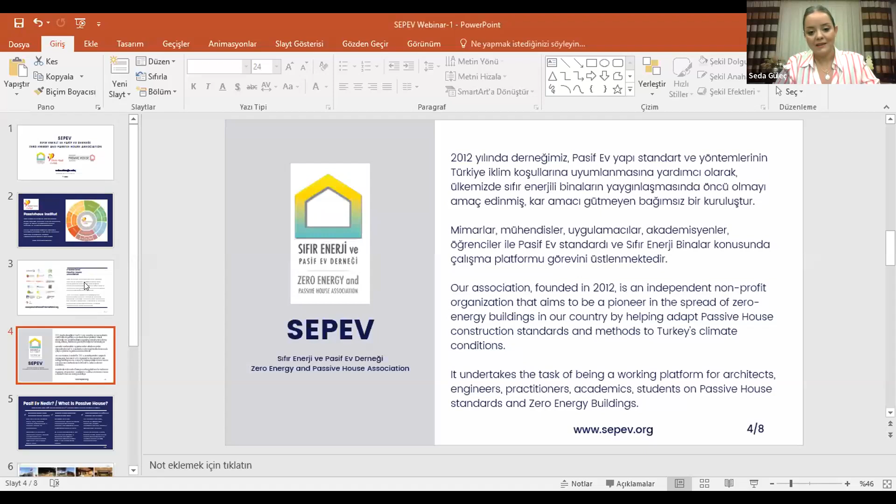Dr. Nesi and Passive House Institute. In fact, Passive House Institute was established in 1996, and our institution was founded in 2012. It's providing a lot of support to the suppliers, scientists, and those parties who are working on passive house, giving information at the global level.

This association undertakes the task of being a working platform for architects, engineers, practitioners, academics, and students on passive house standards and zero energy buildings. Our association was founded in 2012, and we're providing seminars and conferences. We're an independent and non-profit organization that aims to be a pioneer in disseminating zero energy buildings in our country, and we are doing our best to make this known.

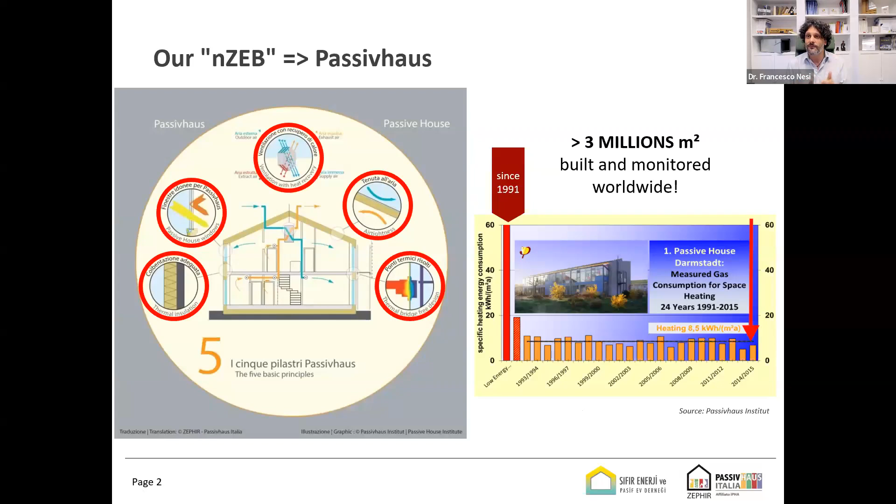Nowadays, we can count more than 3 million square meters built with this Passivhaus standard worldwide. Most of them are also monitored. And as you can see here, we have the monitoring of the very first Passivhaus, which was built in 1991, close to Frankfurt in Germany, which shows that year by year, the Passivhaus building doesn't feel what's happening outside. Basically, you can have a colder year, a warmer year, or some tenants may leave their windows tilted open for the whole heating period. The Passivhaus basically doesn't see it on a statistical average. And that means that we are speaking about a very robust approach and a very cost-effective one.

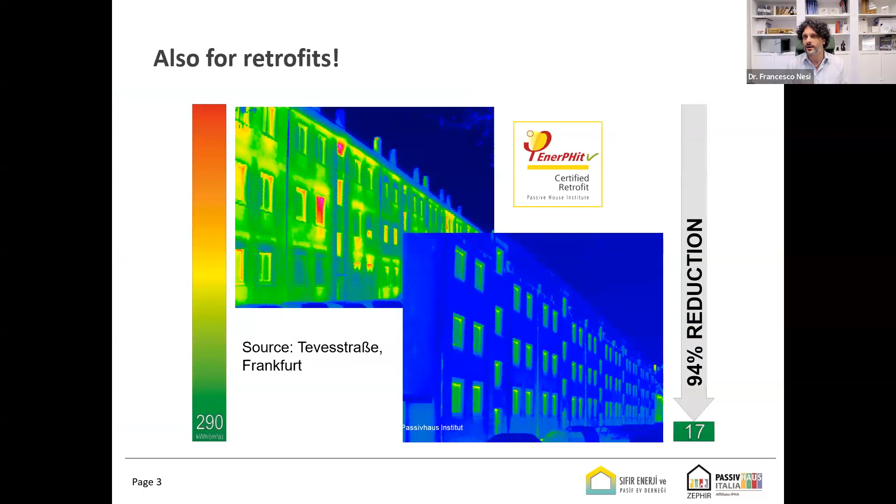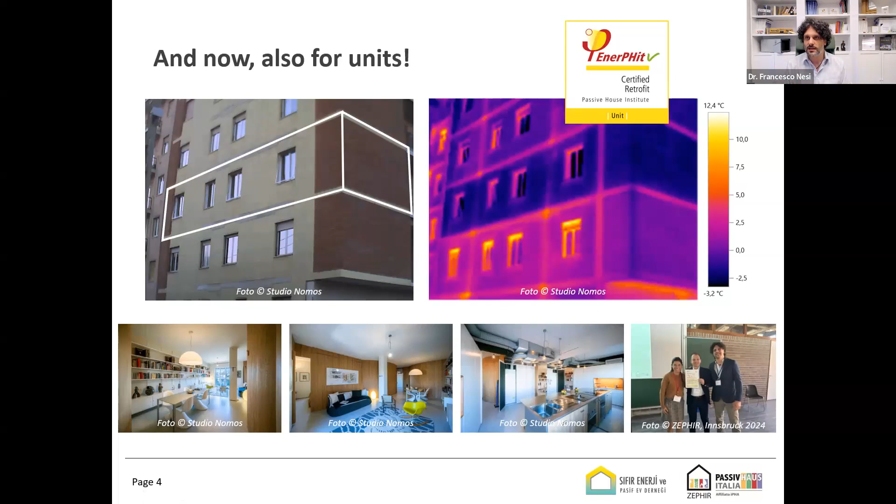And this holds also for retrofits, which is the topic we are going to speak about today, as well as for units. And we are among the pioneers who explored this new possibility and finally got the very first certification as an EnerPHit unit. And here below on the right side, you see PHI issuing us the certificate for the very first EnerPHit unit, which I'm going to talk about afterwards in my presentation. This is in Italy, in Bergamo. But let's keep on speaking about Passivhaus first.

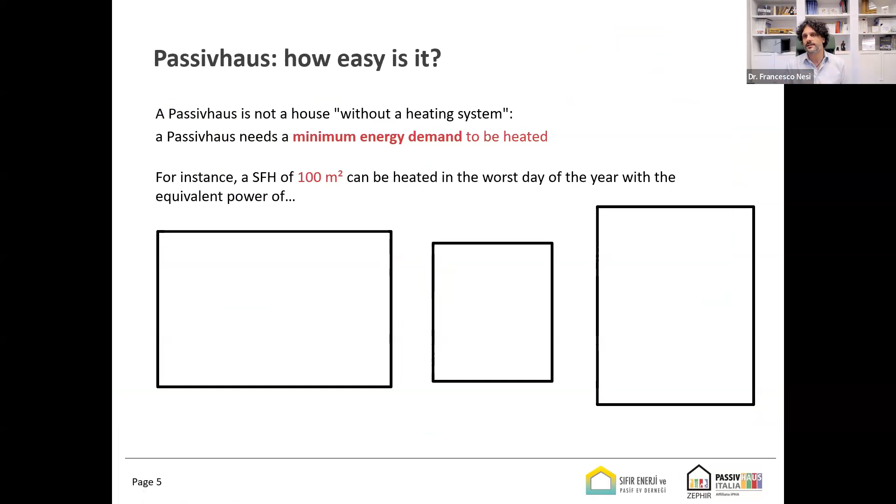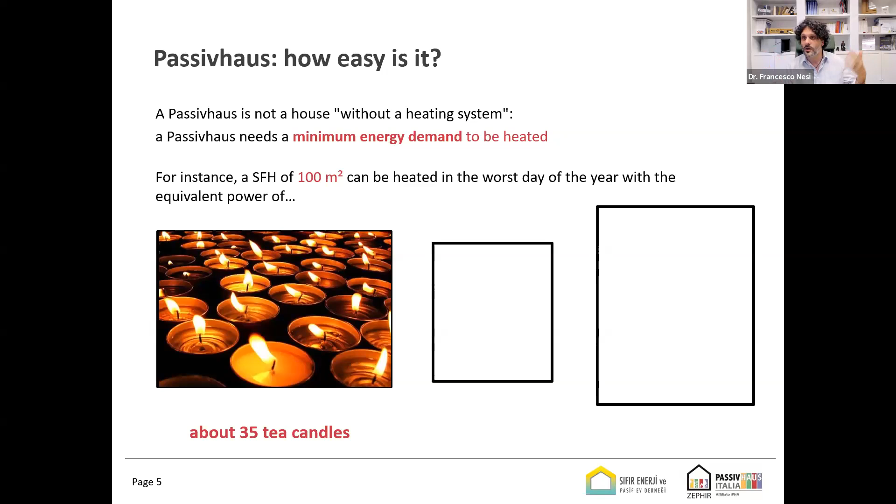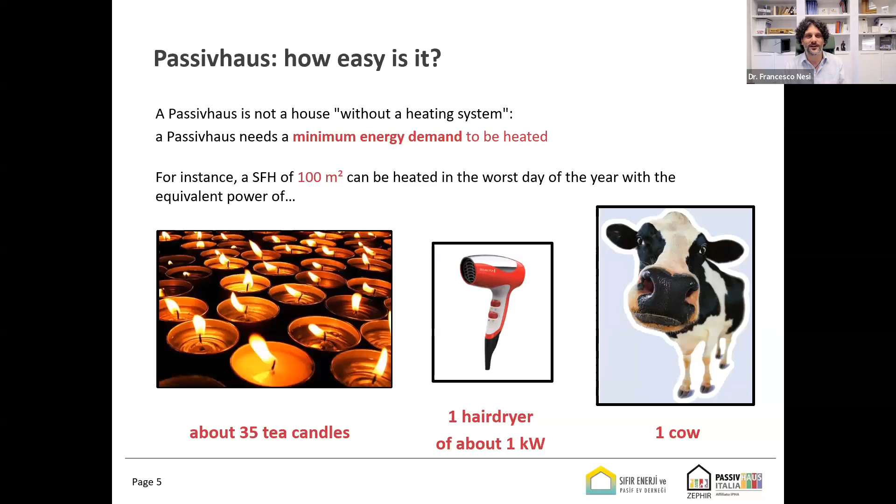So how easy is it? Is it very complicated? How much energy do I need to heat it up, to keep it warm on the worst day of the year? We can assume that the most you need is lighting 35 tea candles, and you have heated up your building on the worst day of the year, or a hair dryer, or a cow, or you could even invite your friends for dinner, and you can get heat for free given by the persons. Of course, you should compare whether you can pay for a dinner for your friends, or you just prefer to light 35 candles. But this is just for fun, just to fix some ideas about how easy a Passivhaus design is.

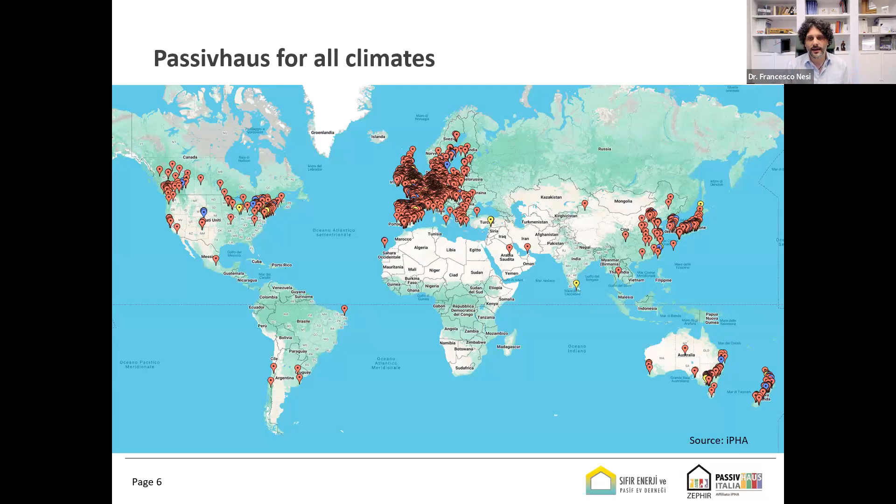Indeed, as already mentioned by Seda, Passivhaus works for all climates, and this is our small contribution in the world. So we have been designing and working in several countries, exploring the most challenging climatic conditions like tropical or subtropical and so on, like Cameroon.

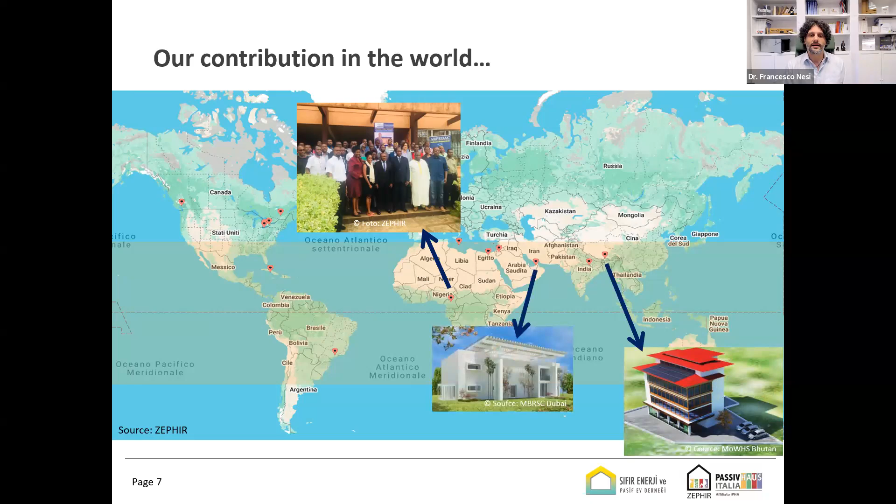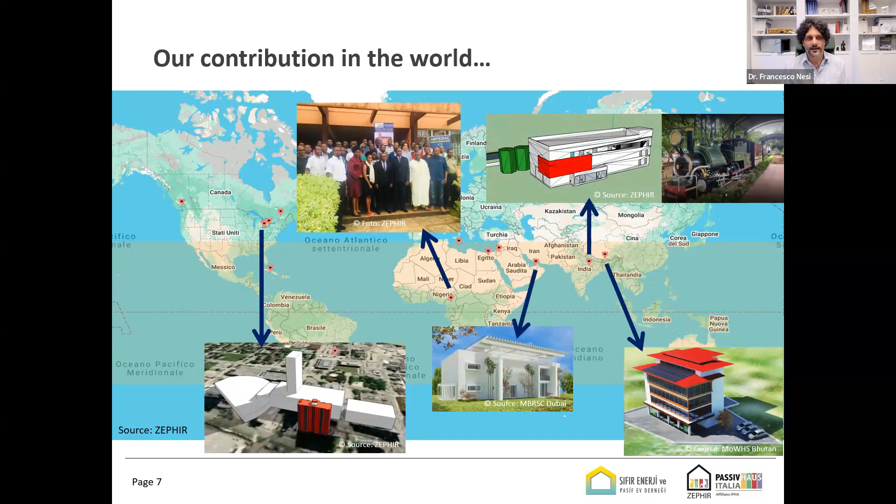We were in Bhutan, a Himalayan country close to India, and Dubai. We have designed a museum in New Delhi, and we are also working in Canada, for instance, for the certification of a skyscraper. So very important for us is to get to know a multitude of climatic conditions in order for us to increase our expertise in designing and supporting designers all around the world for specific projects.

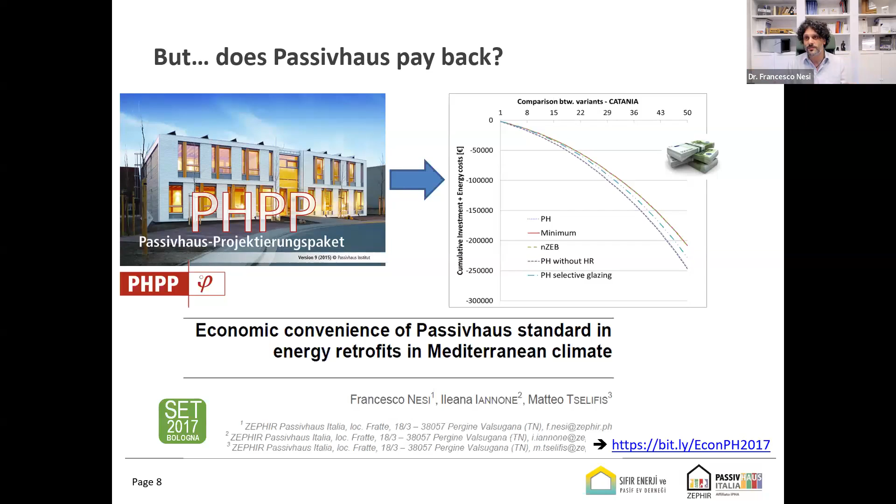So a question which clients always ask us is basically: does Passivhaus really pay back? And how to address this topic towards a client. So back to 2017, we published a preliminary paper about the economic convenience of the Passivhaus standard in energy retrofits in Mediterranean climate, where we explored the possibility to retrofit them up to the national minimum regulation or to the Passivhaus standard. And it came out that Passivhaus indeed pays back immediately, already from the first year. And this was furthermore verified several years later.

So this is an update of 2023, so last year, where we collected a lot of projects. Here I'm just showing some of them, located in several different climatic conditions with different building typologies, either wood or masonry or concrete plus thermal insulation and so on, and with different treated floor area. As you can see here, they are listed by growing treated floor area. You can see very easily that the additional costs, the blue bar, are always lower than the total savings you get already from the first year.

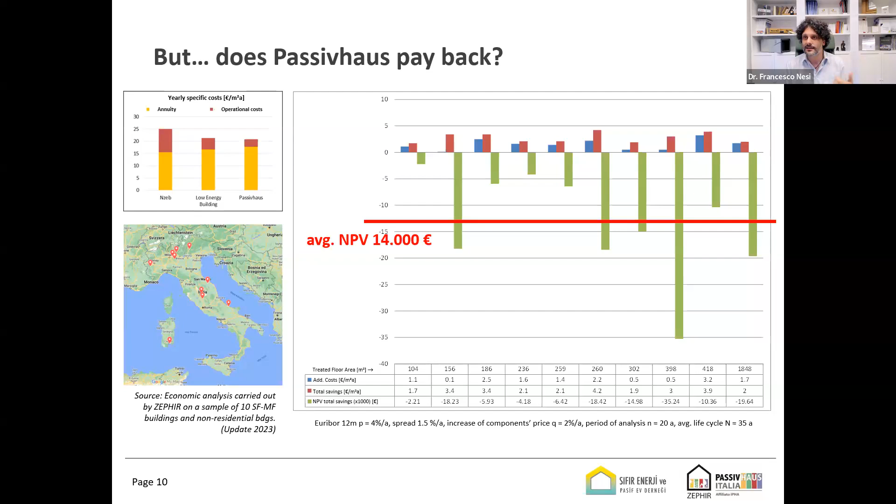So this means for all projects we investigated, we managed through the building physics, through our Passivhaus approach, to bring them to a level that for the client it is immediately clear that they should invest in Passivhaus right now. And if we calculate the net present value of all these projects as an average, we get a free budget, let's say, of 14,000 euros, which means we can demonstrate economically and analytically that Passivhaus pays back, in fact, through the savings during the operation.

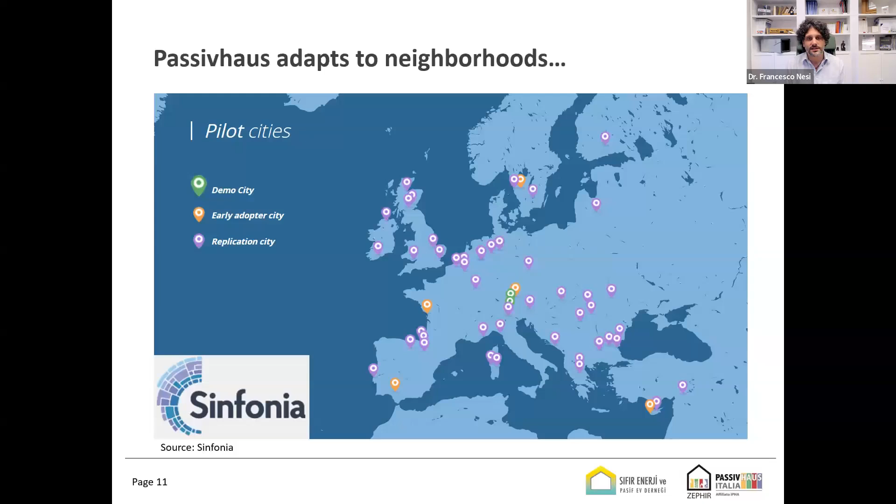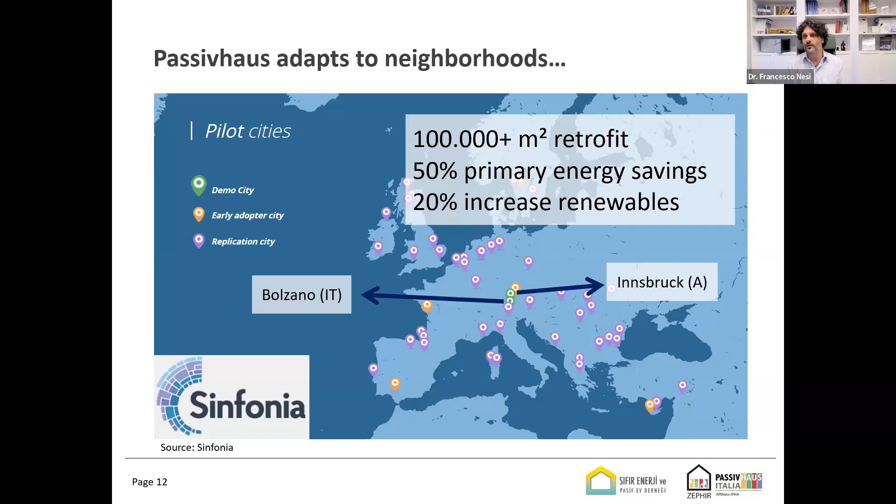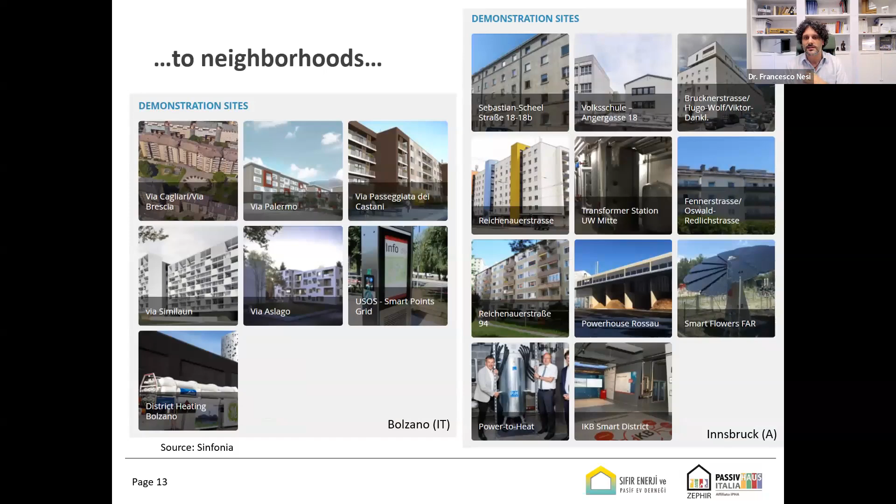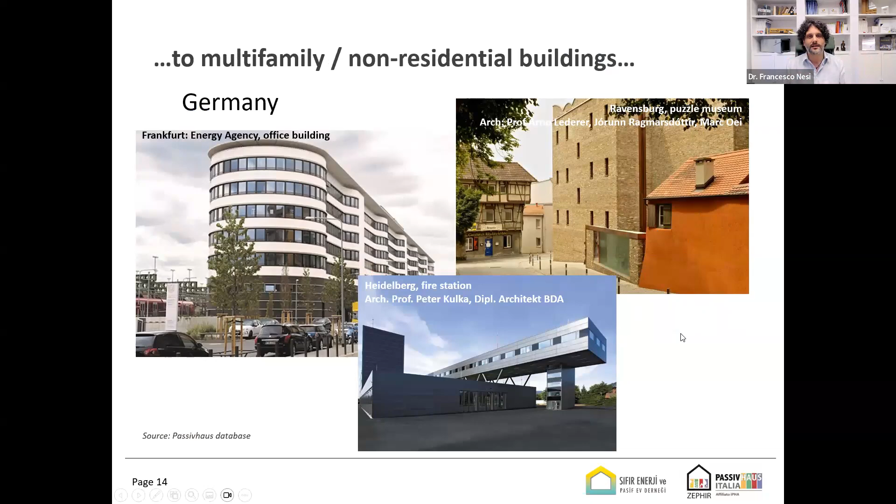Passivhaus also adapts to multifamily and non-residential buildings. Here you can see, for instance, an office building in Frankfurt, or the Puzzle Museum in Ravensburg. You know Ravensburger, exactly. This is the museum for the puzzle, which is indeed a Passivhaus retrofit, or Heidelberg Fire Station. Very different typologies of buildings, residential buildings, very large ones, or even a supermarket at Bahnstadt in Heidelberg. It's very interesting what they did. They collected the free heat released by the fridges and used it to heat the supermarket during the winter time. So nothing strange, just using physics and using reason.

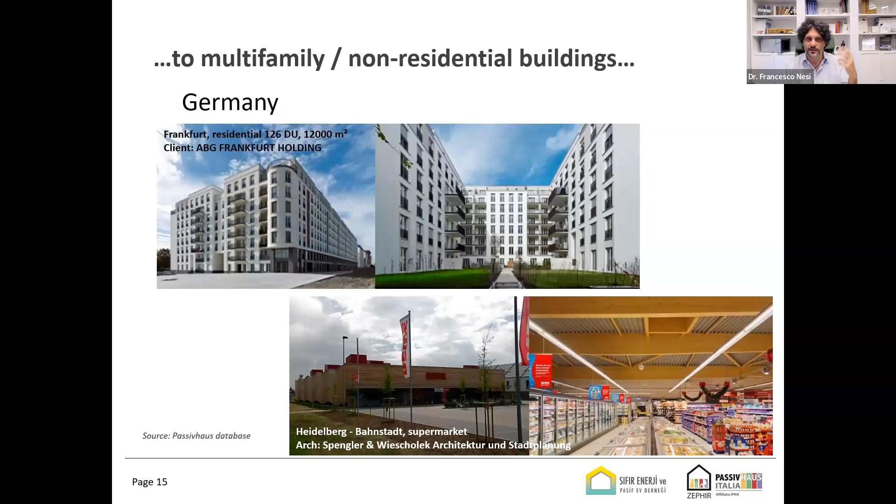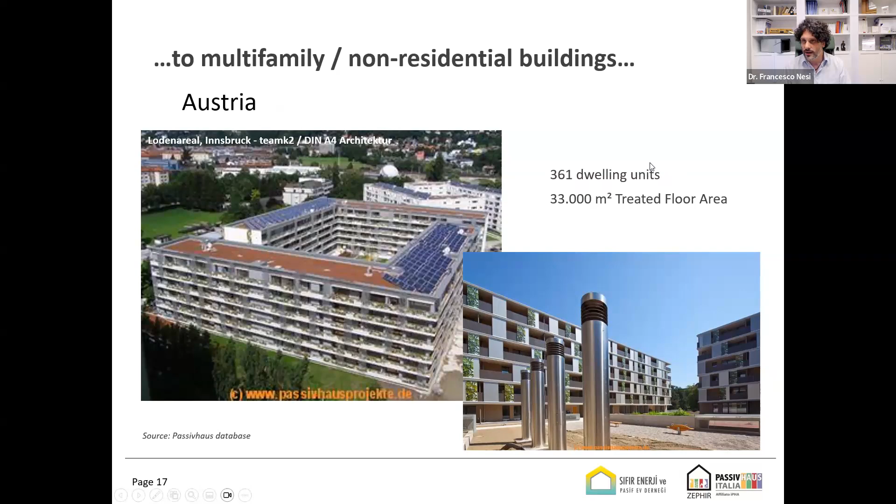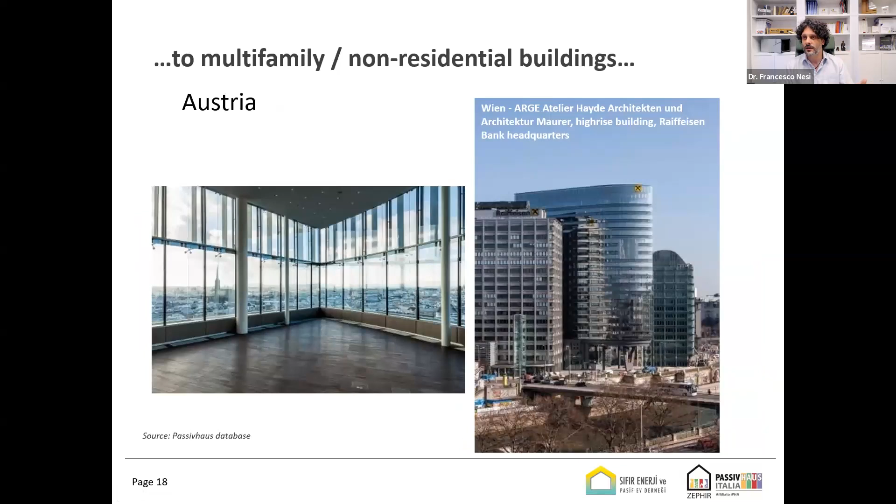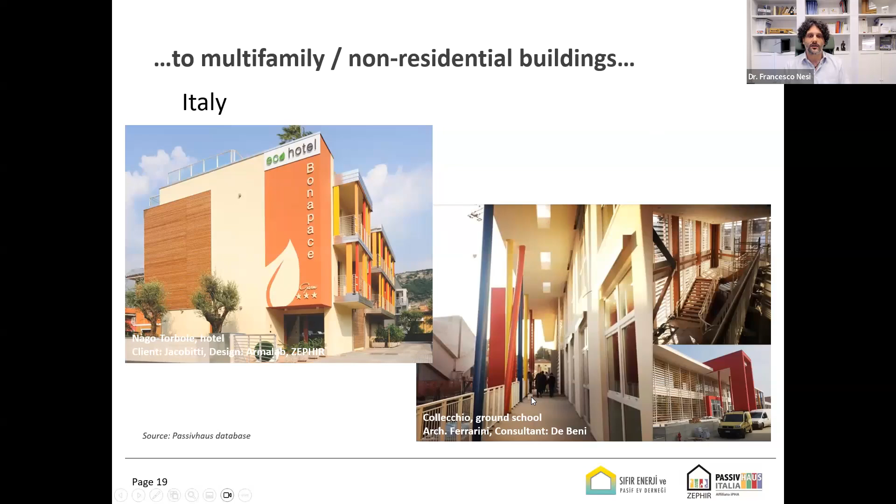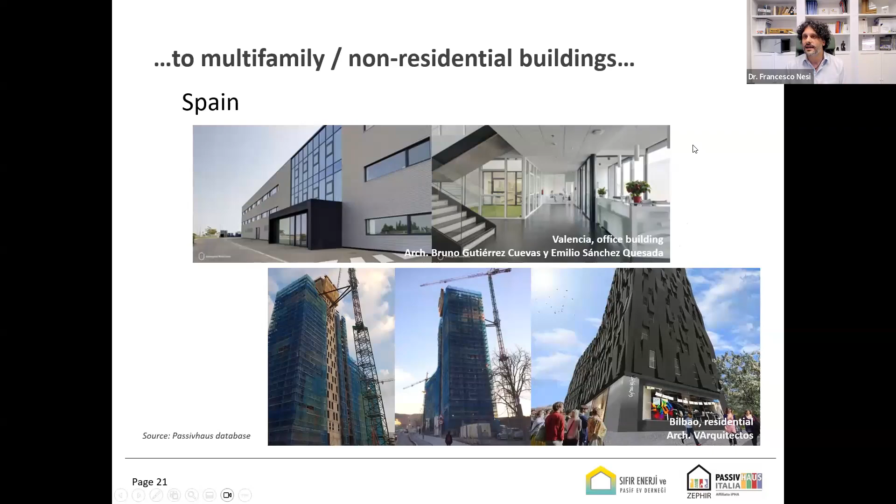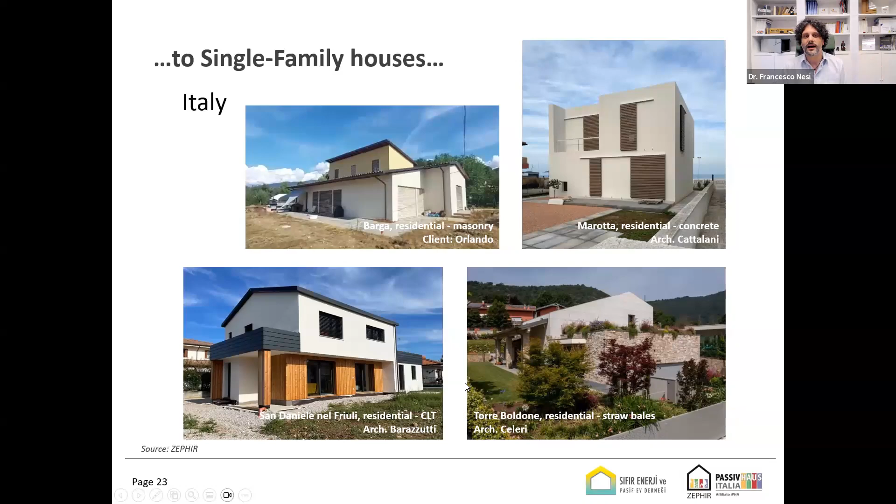In Italy, we also have a lot of single-family houses, and I wanted just to mention a few of them, just to remind that every kind of building typology is indeed possible. Let's say from residential, so masonry construction building, or concrete plus thermal insulation, or residential done in CLT, so cross-laminated timber, construction with external thermal insulation, or even in straw bales close to Bergamo, close to the place where we did our Retrofit unit. And there we come, exactly.

The very first worldwide Retrofit units, one for flat done by us, and another one for offices designed and realized by homegrid. So the Portugal affiliate in Aveiro, in Ílhavo. So this is the office retrofit. I'm just starting by the project done by them, and then I'll come to the project we followed directly. So the office retrofit is located in Ílhavo.

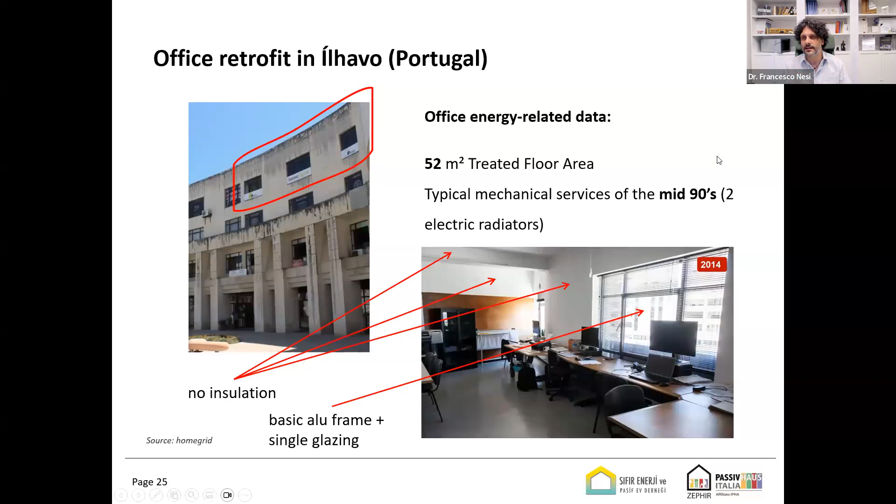These are some energy-related data. So 52 square meter treated floor area, typical mechanical services of the mid-90s with 2 electric radiators, which is very common in Portugal. No insulation at all on walls or ceilings, and basic aluminum frame with single glazing. This is the situation they found in 2014. And after some years, they decided to retrofit it for several reasons.

First of all, they paid so much for electricity, which was indeed needed for heating up the office, and they paid more or less like a rent. So at the time in 2018, the average office rental in Ílhavo was about €5 per square meter a month, and they paid roughly the same. So a second rent, they decided, no, come on, here we must retrofit it.

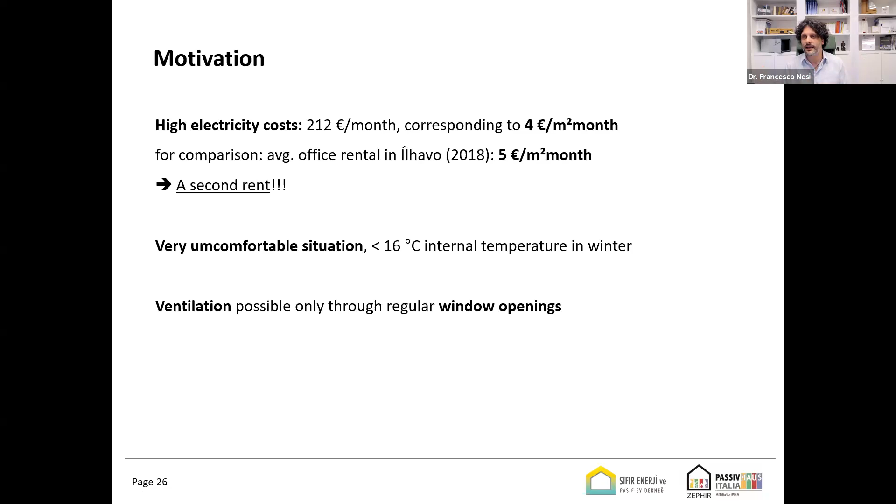Besides this, they had a very uncomfortable situation. They monitored, they measured the ambient temperature. It didn't come even higher than 16 degrees as internal temperature in winter. And the ventilation, they had no mechanical ventilation at the time, and they only ventilated through window openings, thus losing a lot of energy.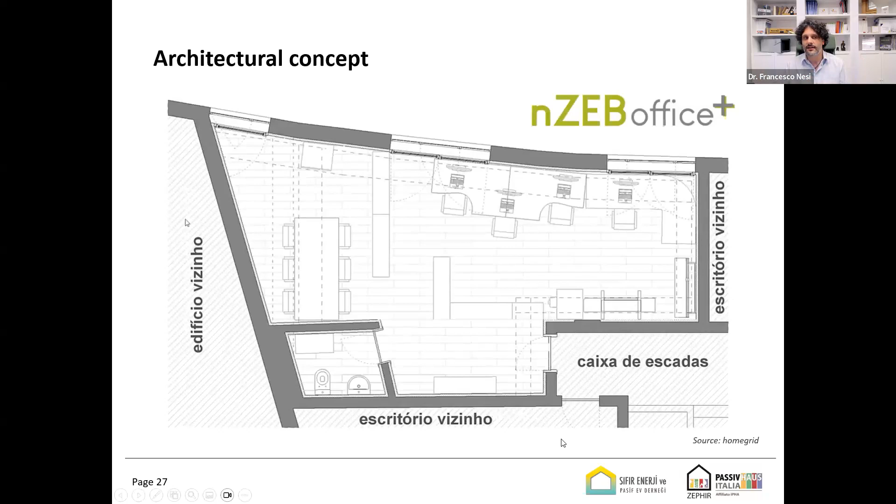So this is the architectural concept. They intervene from the inside, of course. Here is the staircase, and here at the right-hand side and down, they have other offices as well, as you see on the left. So, of course, they had to intervene, as said, from the interior, and they applied on the external walls 6 centimeters XPS. They did the same for the roof, and 2 centimeters XPS to the floor.

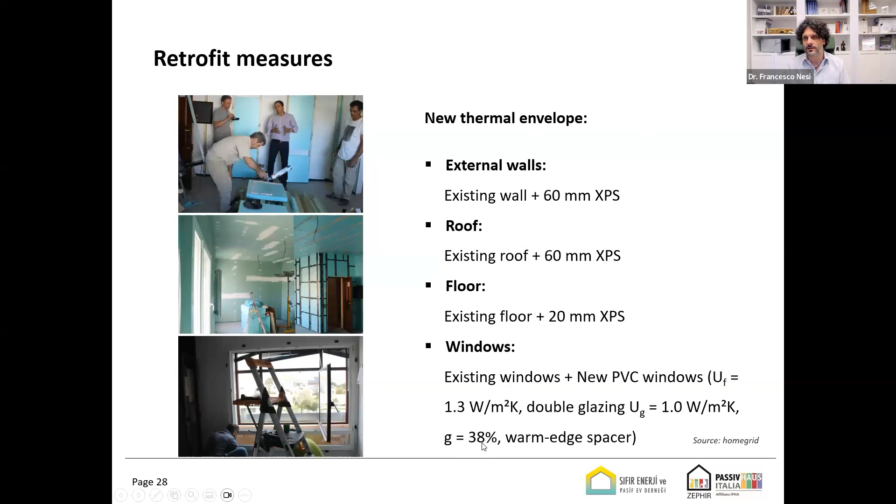And they decided to leave the existing windows there and install on the outside new PVC windows with the Uf usual for this kind of climate, like around 1.3, double glazing, a small g factor, sort of selective glazing with warm edge spacer. New mechanical services were also installed. So a ventilation system came in place, as you can see, with a very, very low annual electricity cost, roughly €35 a year. And for heating and cooling, they decided to install a 2 kilowatt split unit by Daikin Premium Plus.

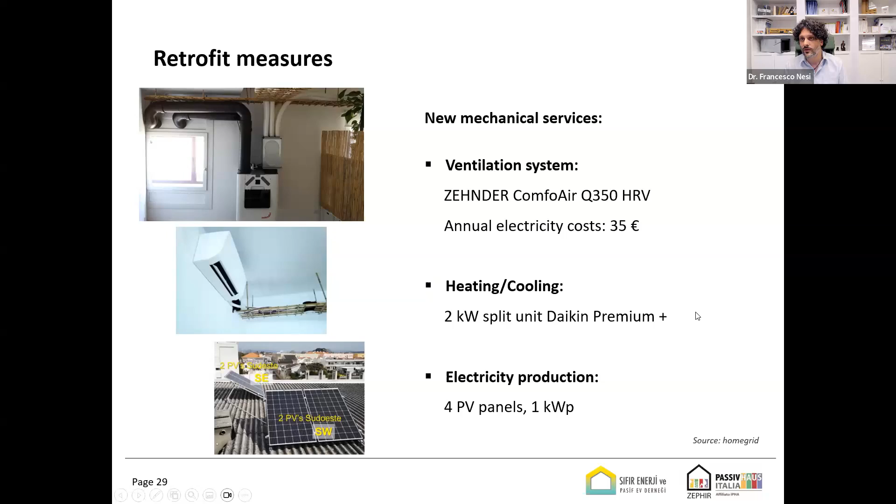Just to have a close look at the PHPP results before the intervention, by assuming, like in reality, that the neighboring offices are not heated, so they are really suffering a lot of discomfort because they are not going to heat them during the winter. Of course, you have a lot more thermal losses through the neighbors. And in this situation, from the actual situation in 2014 to the situation after the intervention, they save even 75% of the energy.

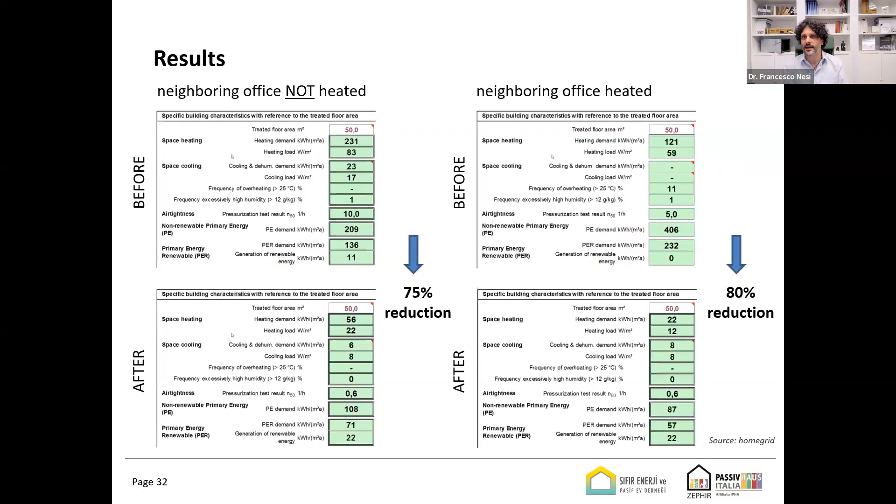And if one assumes that the neighboring offices are indeed heated, which is not the reality, but just in theory, they would have got an 80% reduction. So let's say between 75 and 80% reduction on the overall energy, which is indeed a great result. They are also monitoring the office costs, and as you can see, they are also monitoring the energy production by the photovoltaics, thus compensating the energy consumption, and coming to a negative daily energy balance.

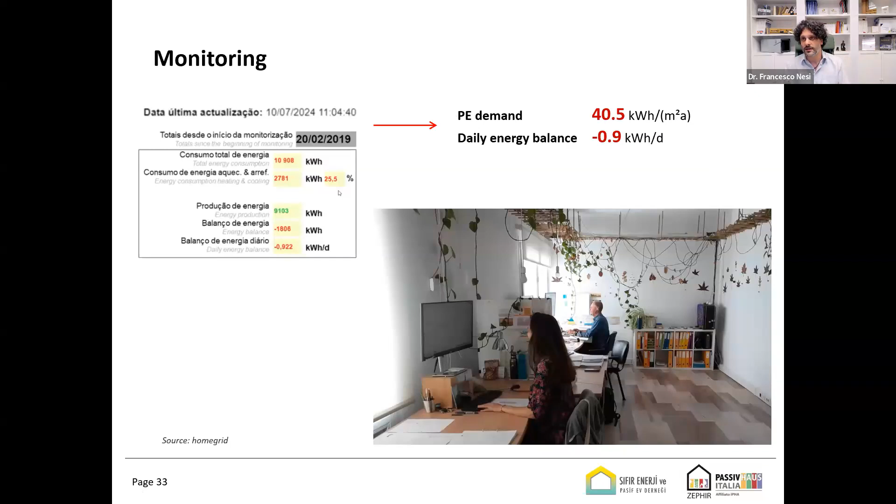So they are getting more energy than needed. And the PE, the primary energy demand, is very, very similar to what was designed before the construction.

Let's come to the apartment retrofit in Bergamo, Italy, which we followed directly. So the owner is an architect, and he wanted to use his project as a showcase to demonstrate that passive house retrofit is indeed feasible. And the motivation is that we have an existing building stock which is composed by basically 93% of dwelling units which are individually owned.

So it's very, very difficult to retrofit a multifamily building, because most of the times this will never belong to just one person who can decide for the retrofit, but we should agree among all the tenants what to do, and we will never come to an end. And that's why it's very important that we wanted to demonstrate the possibility to retrofit just one dwelling unit.

We had several financial schemes. I also see in the chat that someone is asking this, called super bonus. So after the COVID, we got a lot of money from the EU, which the government decided to invest for retrofitting buildings and dwelling units. But as you can see, since 2020, people didn't use this money to come to the highest possible energy level, as one could think, but just reaching the lowest energy classes.

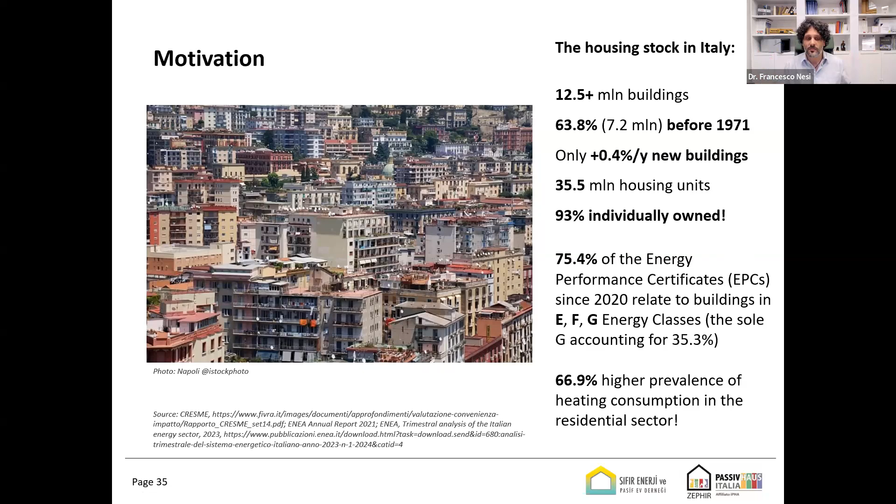So this big amount of money didn't indeed produce a significant energy reduction for the Italian sector, and just 1 or 2% of the energy performance certificates are listing buildings in class A, the maximum, which is a very bad situation. And even though we are the country of the sun, as one always says, still we are consuming so much for heating up our houses, and we can estimate that this is around 67% of the heating consumption coming only from the building sector.

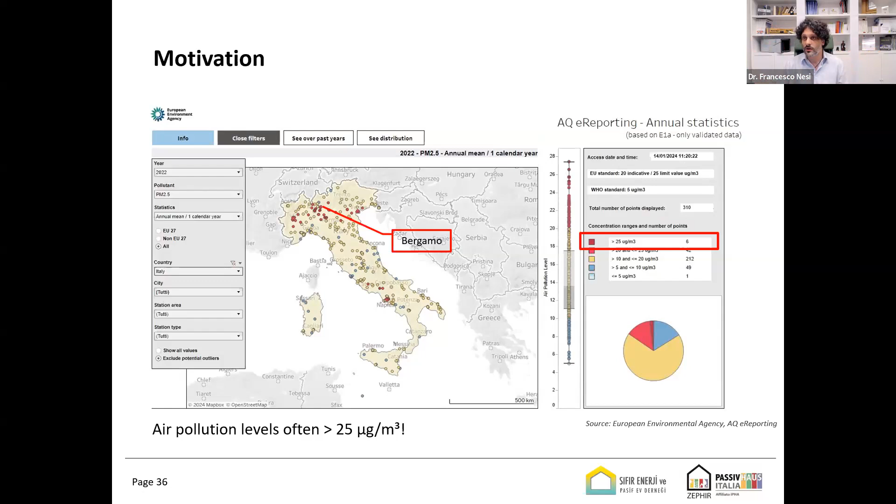Another motivation for the owner, for the client, was due to the very bad air quality in the Po Valley. As you can see also from the literature or from the internet, the Po Valley is a very flat valley, which is very highly polluted from Milan to the Adriatic coast, and the need for fresh air quality was in fact a good motivation, a good stimulus for the client to proceed with the passive house approach.

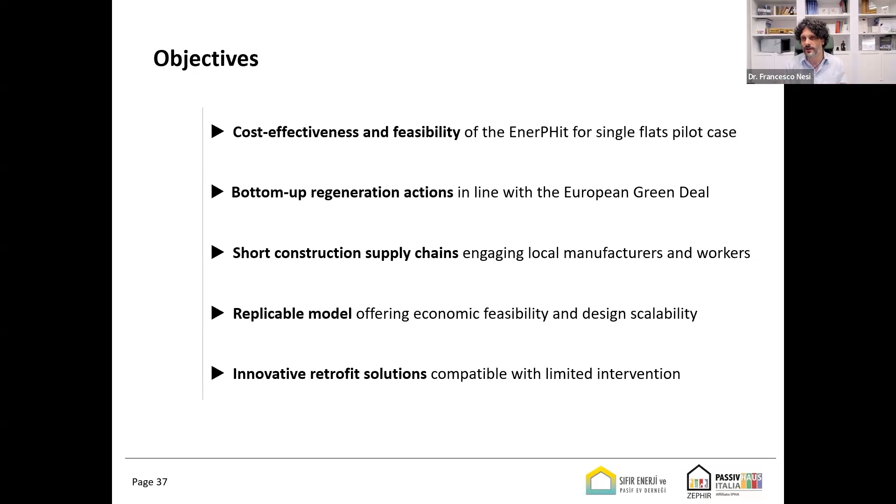So the objectives, first of all, cost effectiveness and feasibility of EnerPHit for single flats pilot case. So we wanted to show this. We wanted to implement bottom-up regeneration actions in line with the European Green Deal, and to realize short construction supply chains engaging not experienced but still motivated local manufacturers and workers, thus creating a replicable model offering economic feasibility and design scalability, and finding innovative retrofit solutions compatible with limited intervention, as it happens in multifamily buildings.

And interior thermal insulation was indeed a major challenge, because this would have increased the risk for interstitial condensation and mold formation. Another big issue to overcome was to create a seamless airtight layer and thermal bridge mitigation. So an ambitious task, also because we had architectural and structural constraints. Due to very heavy traffic in the neighboring street, we couldn't install external scaffolding, and that's why we had to be very quick in doing all the works.

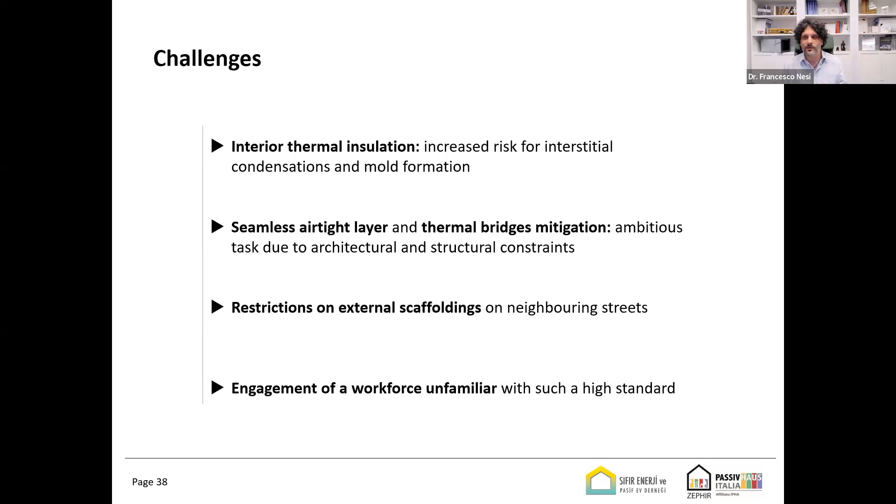And also the engagement of a workforce unfamiliar and untrained with such a high standard was also a major issue, which we will see in a moment. And we had to train them really on the building site.

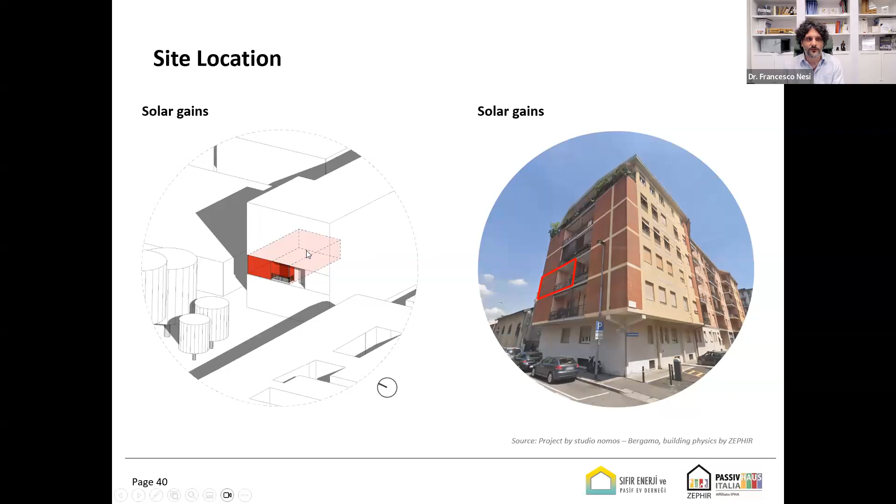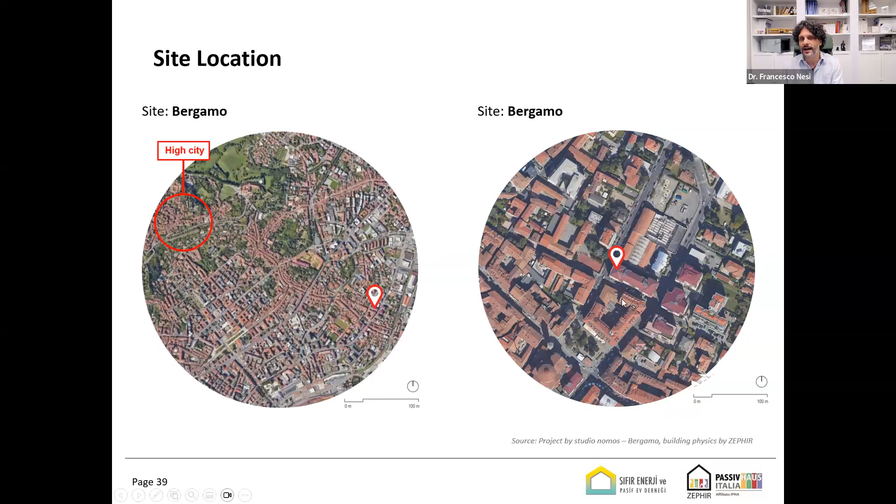This is where the project is located. So here, not so far from the city center in Bergamo, this is the big building. So just one dwelling unit in a multifamily building of 120 dwelling units. And of course, due to the constraints, we had limited solar gains. As you can see here, the only two exterior walls are facing north and west. And at the western side, there are also very big and high surrounding buildings, which also produce shading on our dwelling unit, on our flat.

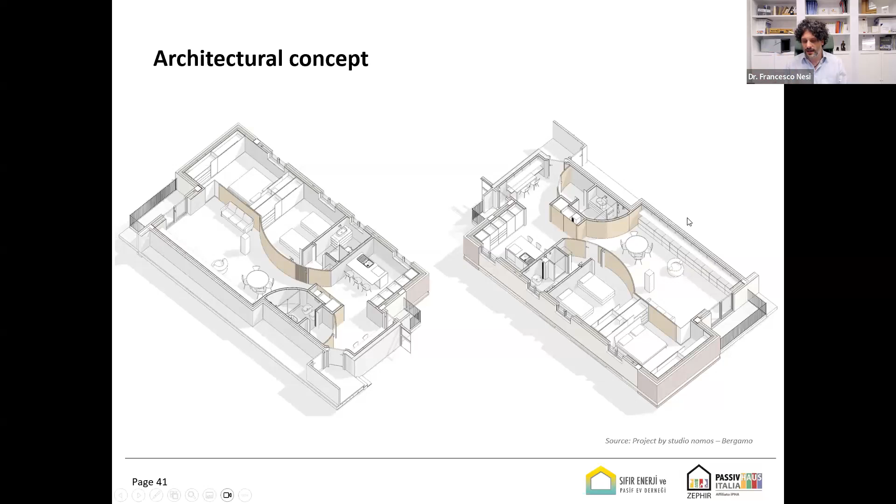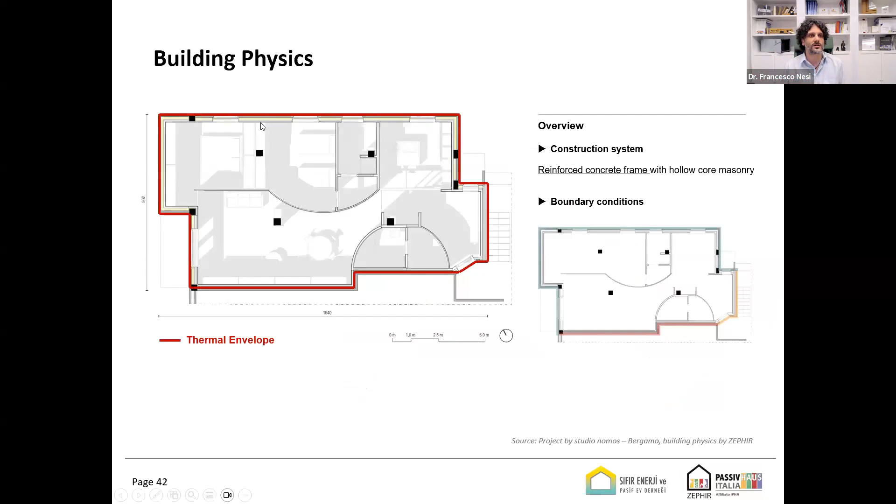So this is the architectural concept after the renovation. Here you can see a couple of balconies, which were then also used for installing the air conditioning outside. And the walls were done by wall cavity, so 2 layers of brick with an air layer in between. So we decided to remove the internal shell by installing some insulation on the interior. This is how it looks. So for the building physics, as a building physicist, we should also have this slide, of course. So this is the thermal envelope, and these are the boundary conditions.

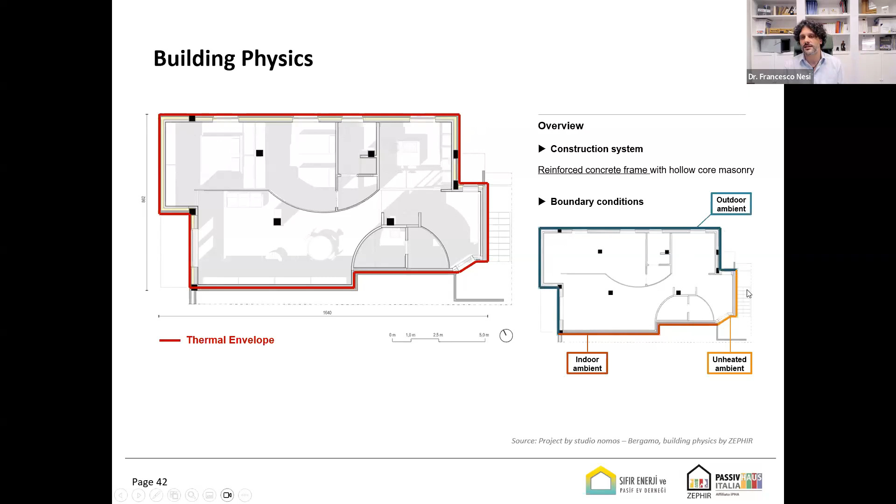So these walls are facing outside, so to outdoor ambient. Here they are towards a neighbor. That's why we are not losing energy through these walls. And partially we are losing energy through the staircase, so to one unheated ambient.

We used a very high thermal resistant material, which is polyurethane, directly in contact with the outside layer of bricks. And in the service cavity, we installed mineral wool. Then we have concrete pillars in between, and they were wrapped up by vacuum insulation panels with a very, very low thermal conductivity, thus not taking out any centimeter more of living space to the interior. So this was also one of the goals we wanted to reach. The rainwater downpipe was also installed inside the insulation layer.

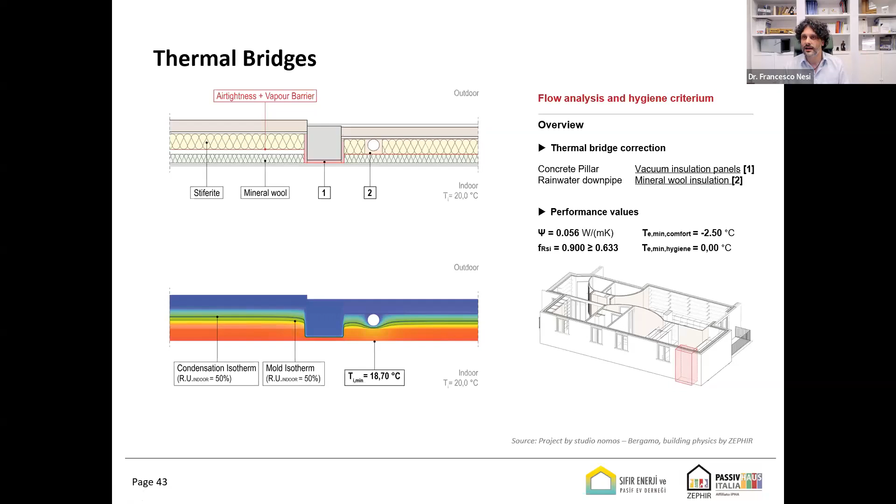And as you can see here from thermal bridge calculation, everything is very well realized, and the minimum interior surface temperature is pretty high, thus giving a lot of more comfort to the occupants. By intervening from the interior on the sole flat, it may happen that we are not heating up for free the neighboring apartments, thus putting them in a very bad situation in terms of mold formation, because it may happen that their surface temperature is decreased at a point that mold forms on the perimeter building assemblies.

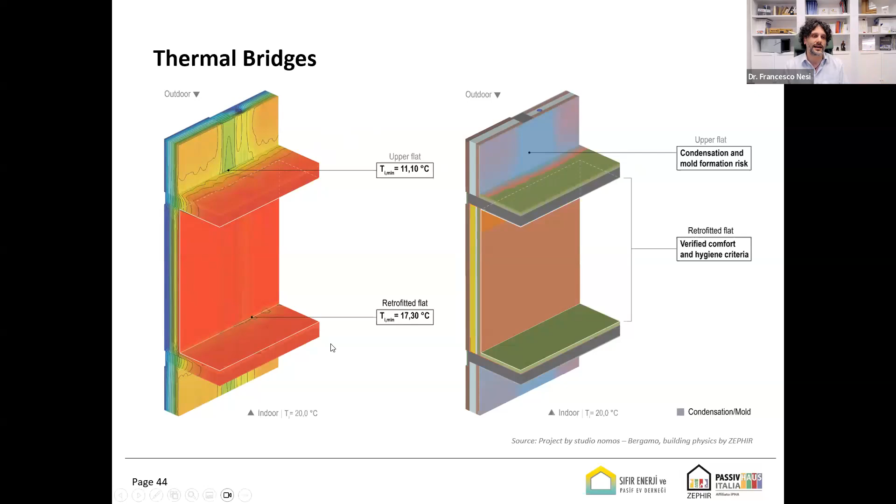That's why we also realized 3D thermal bridges in order to understand this issue, and we wanted to verify this before starting the construction. So here you can see a vertical section through a French window towards the balcony. Here in the center is our flat, and here upper and below we have the neighboring apartments. Before the intervention, the interior minimum surface temperatures were totally in the area of mold formation or even condensation.

And after the intervention, as you can see, a new roller shutter box was installed, very well insulated, triple glazing instead of single or double glazing with air in the gap between the glazings, and some lateral insulation done by calcium silicate panel was also put here in order to increase the surface temperature.

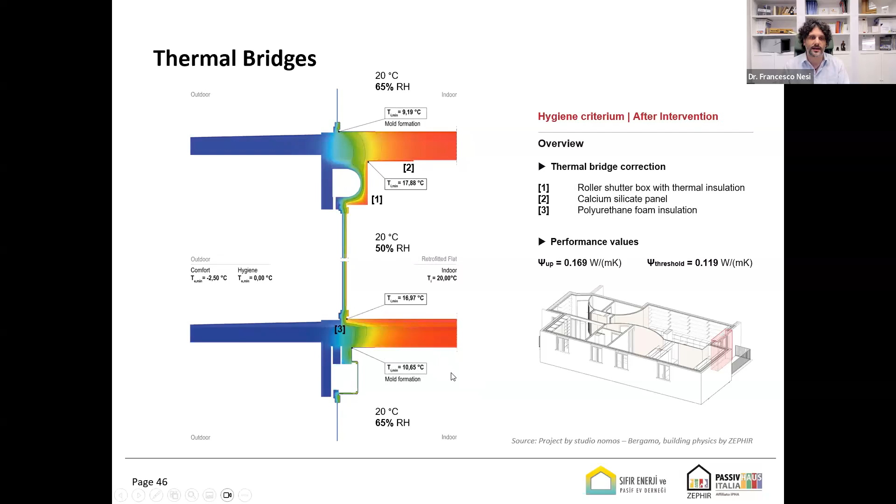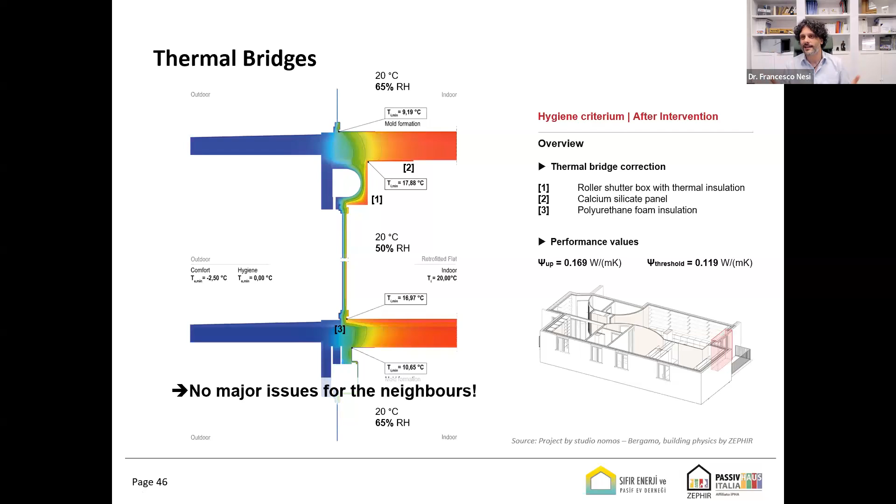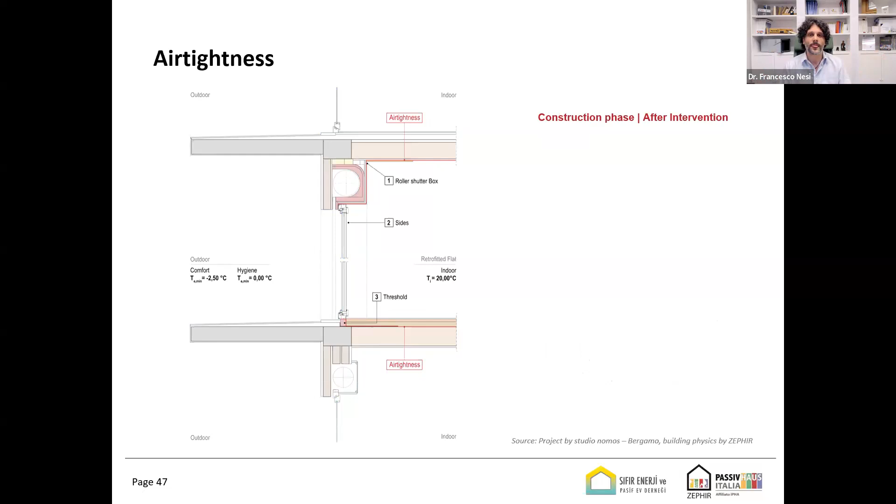And you can see that on the other hand, the minimum surface temperatures of the neighboring apartments didn't vary so much from before, because we had 9 something and 12 something, and afterwards 9 something and 10 something. So it was bad before and is still bad afterwards. So it didn't create any major issue to the neighbors. So if they have mold, it's their fault and not ours. This is very important also to prove to the neighbors, also from a juristic point of view.

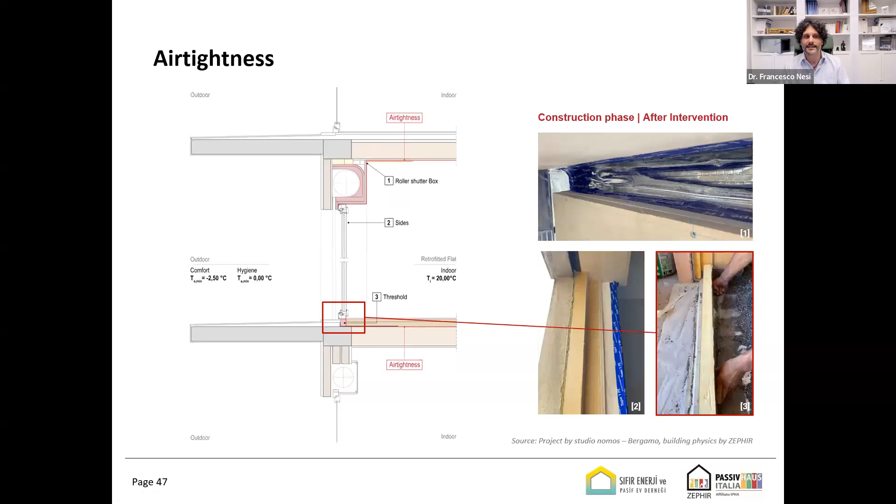For the construction phase after the intervention, good care was also taken to the realization of the airtight layer at the joint with the intermediate ceiling, as well as to the reveals of the windows and the seal of the French windows. And nevertheless, even though we trained all the workforce used at the building site, they made a sort of disaster, because as you can see here, there are a lot of cracks in the airtight layer, and the result of the blower door test was totally unsatisfactory, being larger than 1.6. And we were striving for less than 1, at least.

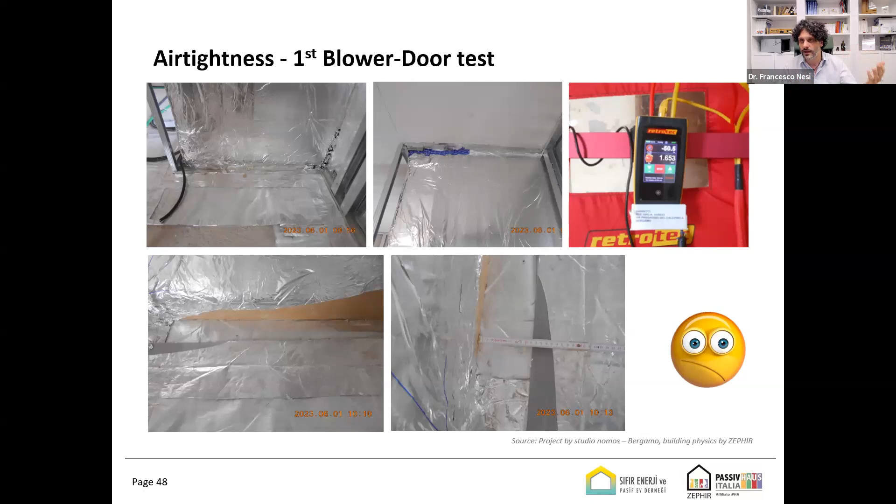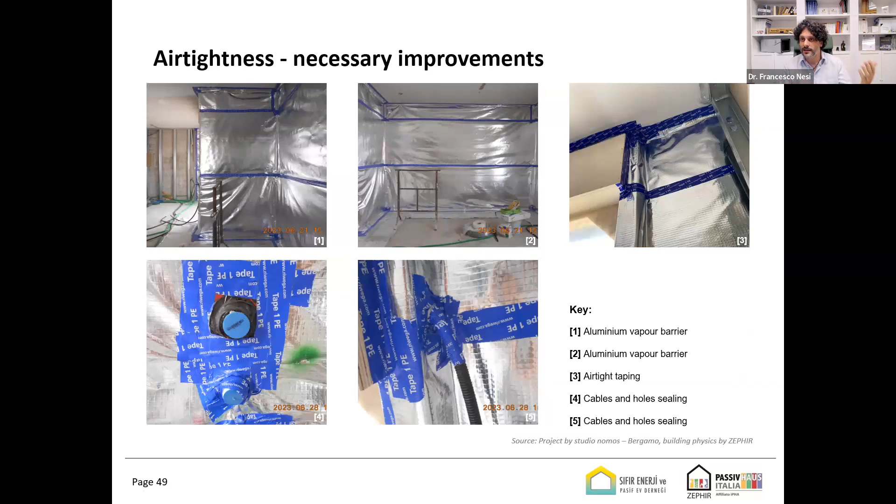Of course, this is due to the workforce unfamiliar with air tightness, but also to the bad choice of the membranes done by the owner. Then we trained them, we explained it again, and they redid everything from scratch with the necessary improvements, as you can see, and also by the right use of tapings everywhere, we could come to the desired result. So 0.77 calculated with the ISO 9972 and rescaled with the very old 13829, it is still below 1. So we were very satisfied in the end.

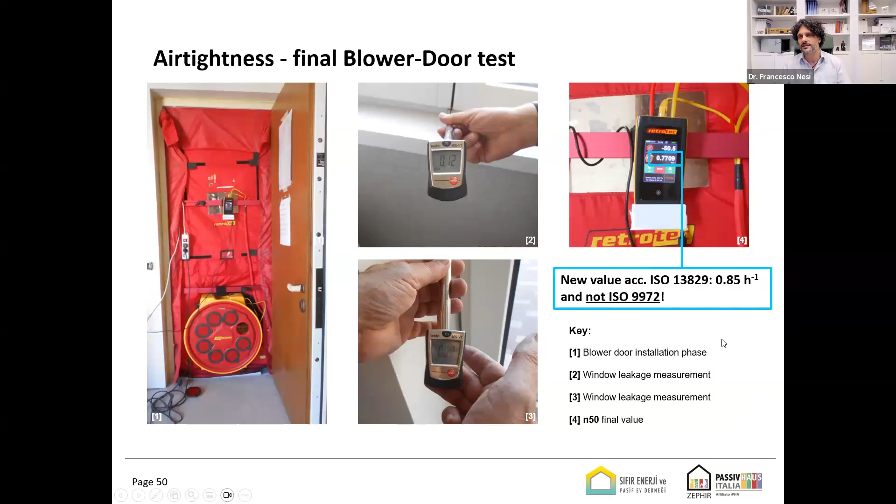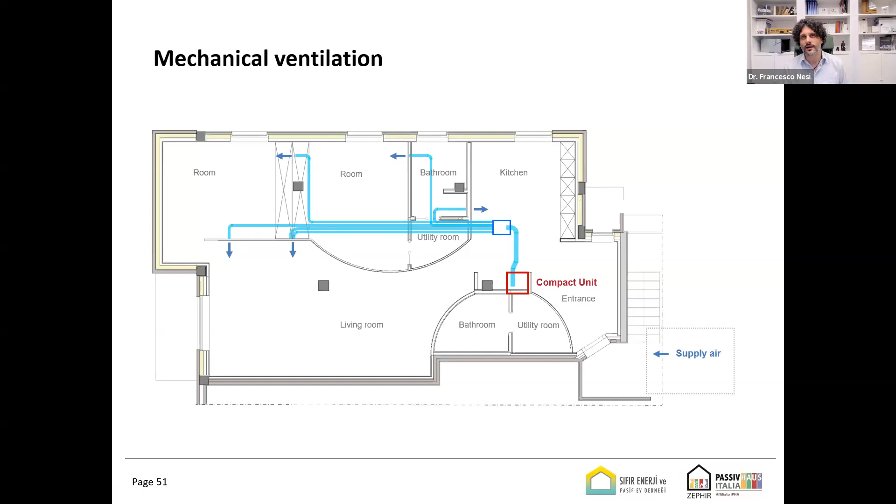And concerning the mechanical ventilation, we decided to install a compact unit, which is basically a heat pump connected to a ventilation system. And this is how the distribution looks. So this is the supply air, a very compact distribution, also by taking into account a very small amount of false ceilings in order also for the client to save money.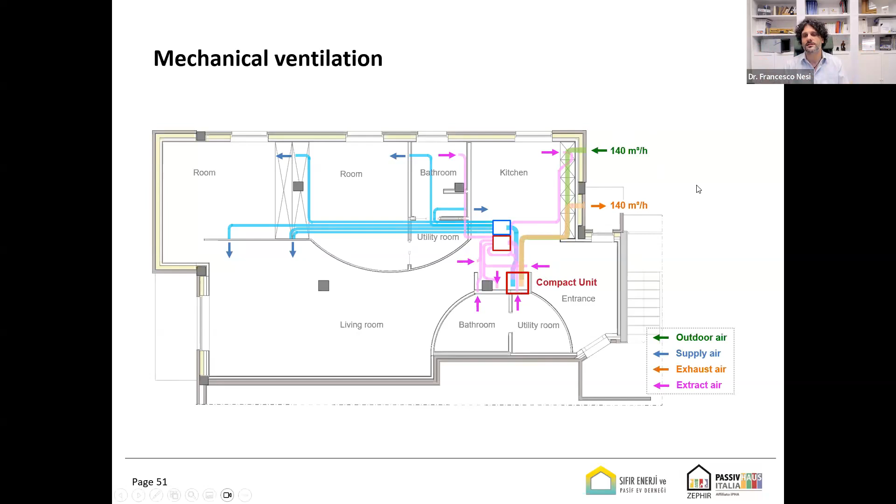This is the extract air, which is very compact indeed. And this is the distribution of the outdoor air, fresh air, purified from smoke, fog, pollens, and so on. And on the other hand, this is the distribution of the exhaust air. So everything very, very compact.

And parallel to this, we decided to install recirculation units for heating and cooling in the same space we already used, where we installed false ceiling for the distribution of the supply air and this extract recirculation air.

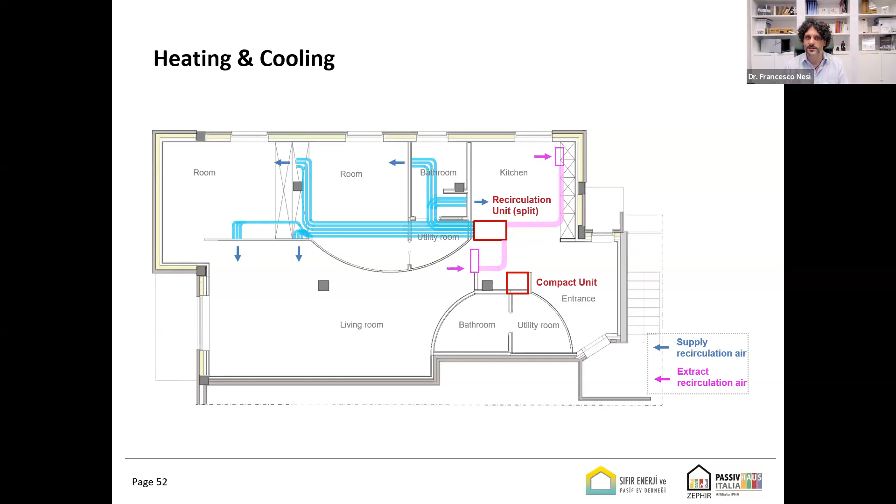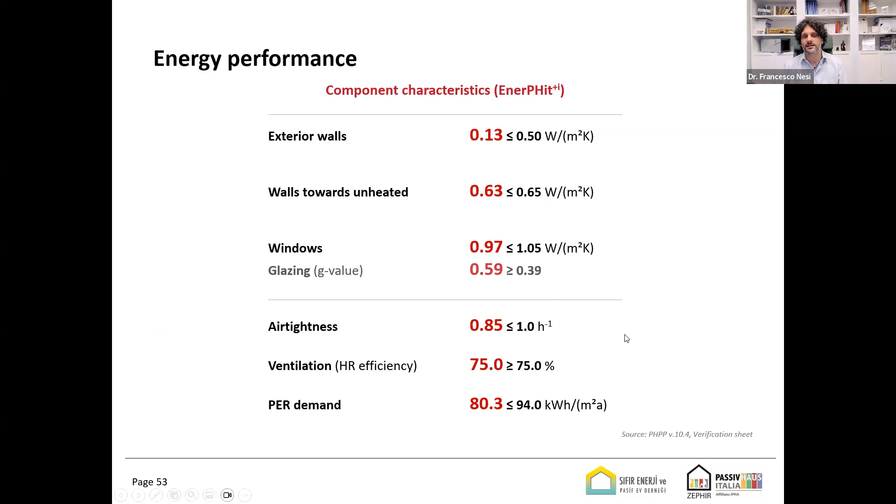These are the energy performance of the final building. As you can see, the exterior walls of the final flat show smaller U values compared to the office in Portugal, because Bergamo is located close to the Alps in the northern part of Italy. And windows also are less than 1, and glazing is done in such a way that we try to maximize as much as possible the solar gains during winter. And air tightness is less than 1, ventilation, heat recovery, and PER demand.

So these are some pictures of the construction works. Here, first of all, everything was demolished inside, and after removing the internal brick shell, this is what is left outside. So only 10 centimeters brick, and then we installed the internal insulating materials and so on, as I already showed you. The realization of the airtight layer, closing everything with gypsum board and so on.

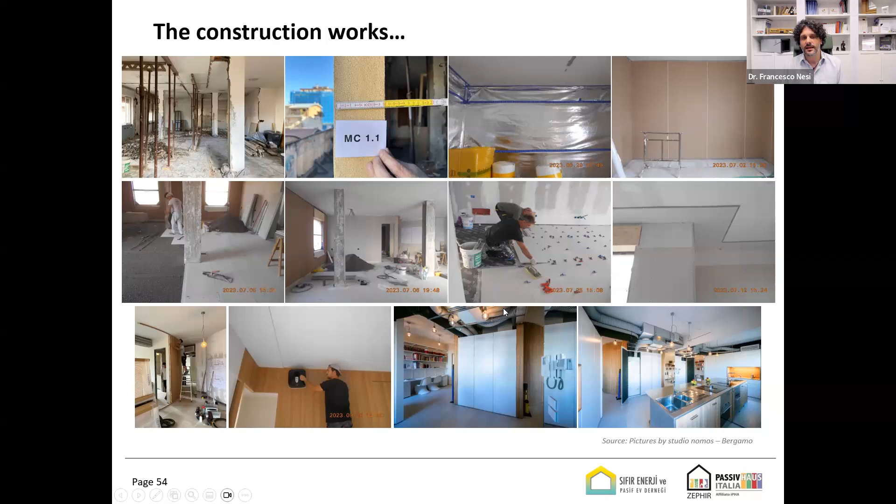And this guy is performing the balancing of the ventilation system. And this is how it looks, the installation of the ventilation and the split units in the false ceilings. And this is how it looks in the end.

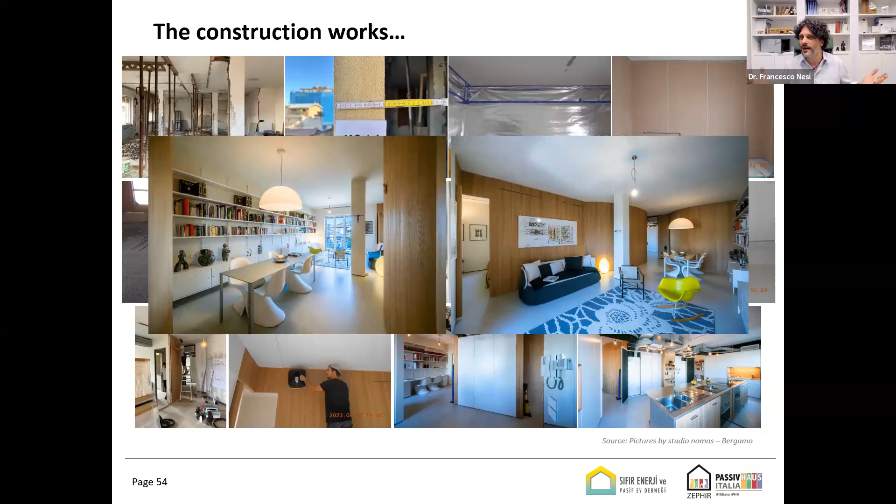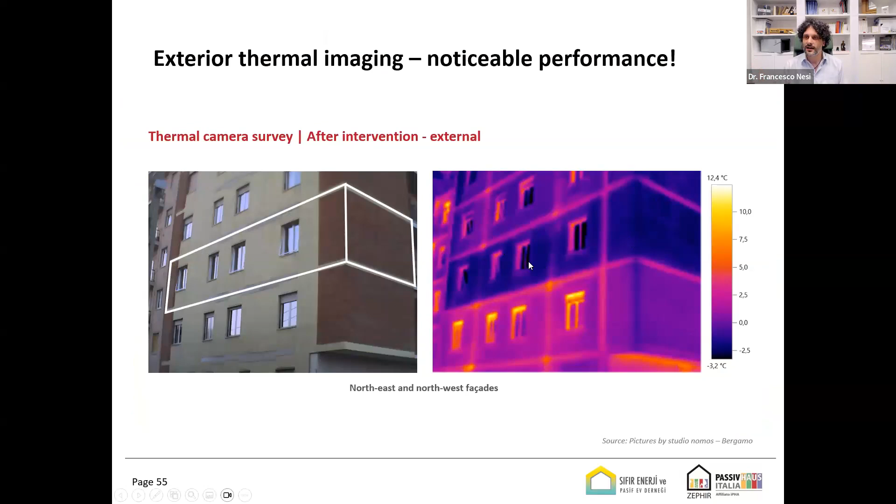So nobody could say whether this is a passive house or not, but it was also proven by thermographic image, and you can really notice the huge difference with respect to the neighboring apartments from outside or from the inside. As you can see here, there are small pieces which may only be due to some shading in the thermographic camera, so everything is perfect.

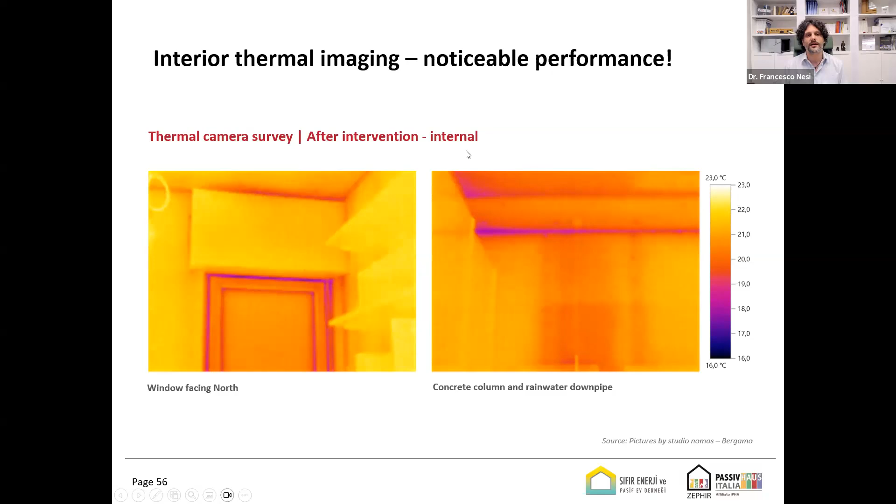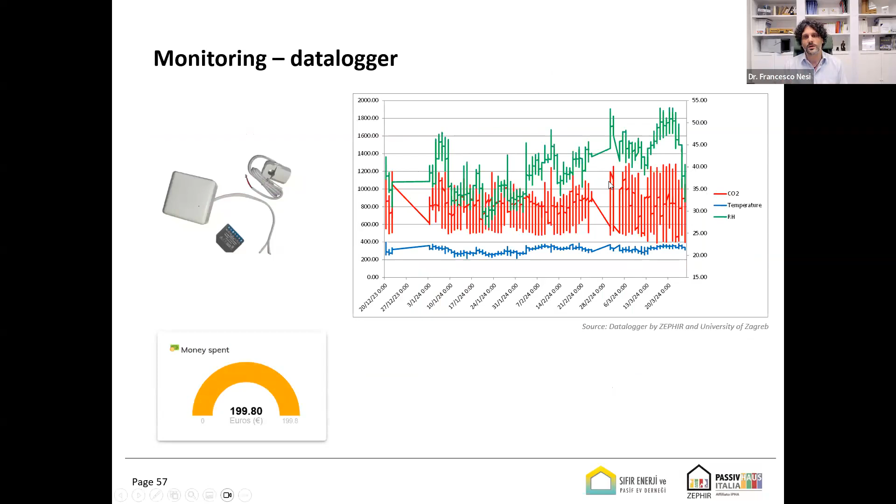And we are also monitoring through some data logger that we realized and installed as a pilot project in this very flat. And we are monitoring not only the comfort parameters such as temperature, relative humidity, and CO2 levels, which always stay limited during the whole day, but also the money spent from the beginning, which corresponds to €2 a day for the whole energy consumed by the building. So sort of the cost of a cappuccino in Italy, let's say.

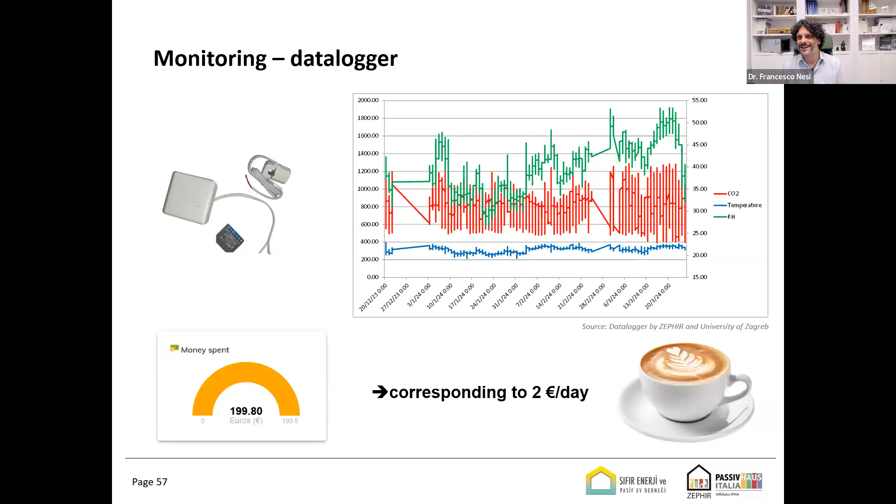And the lesson learned is that we managed to create a replicable and scalable model. We found an effective and affordable solution to retrofit the post-war real estate sector. After making a real comparison between a normal retrofit and the retrofit according to the passive house principle, we could really find out that there are no significant additional costs compared to a regular retrofit up to the minimum required by law, which are the NZEB buildings. At the moment, around 1,300 to 1,400 euros per square meter. So they are really comparable.

We see a wide potential after realizing this very first EnerPHit unit certification for the retrofit of the existing building stock. There are still some criteria to be fully defined. For instance, we are still speaking with PHI about the criteria for air tightness and so on. So more pilot projects are needed.

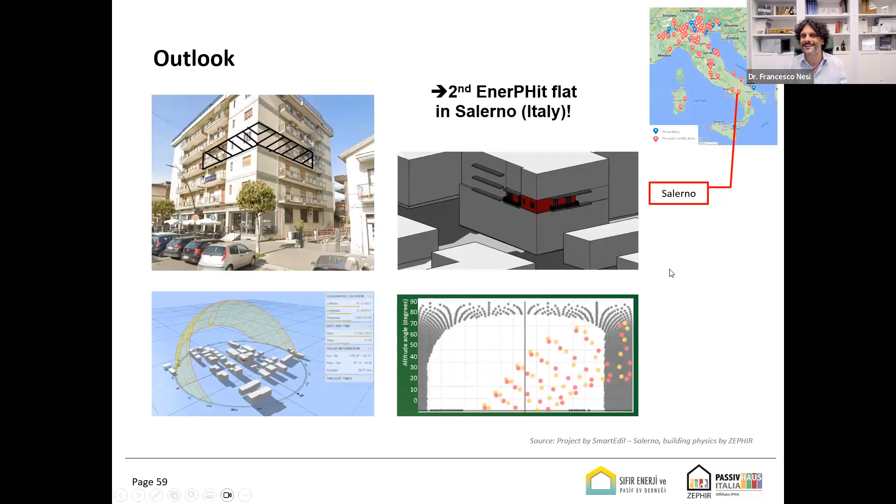And indeed, we got the second one in Salerno. After showing a client what we did, he decided to sign the contract and to proceed with the second EnerPHit flat. So in the more Mediterranean area, similar to what you have, as you can see here, very similar to the first one. But if you think about your building stock, it's really viable and you have very similar situations in Turkey.

So further steps for all of you attending this webinar is training, for instance, to get the designer certificate or to be certified as a passive house tradesperson. There you can go to the ZEPHIR website to inform yourself and participate, engage yourself, because it's very important to have a workforce familiar with this concept, whether you have to do a passive house project or not, but you think another way after the courses, and possible support and consultancy also from our side

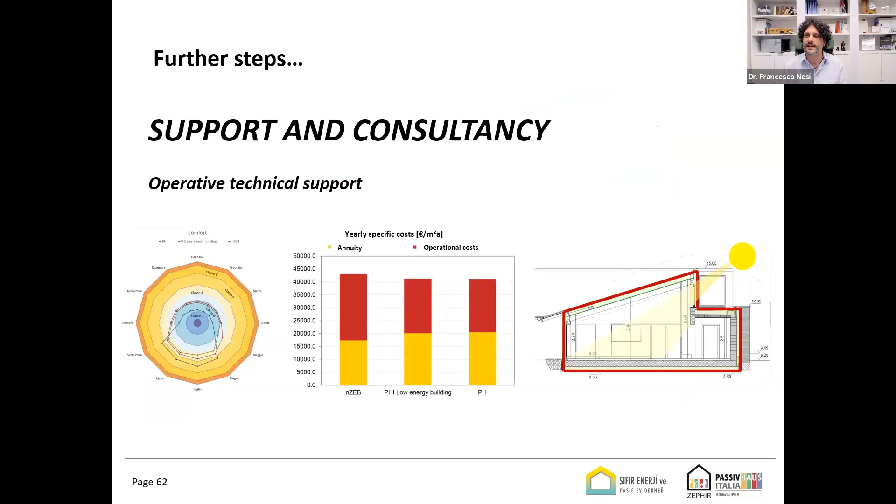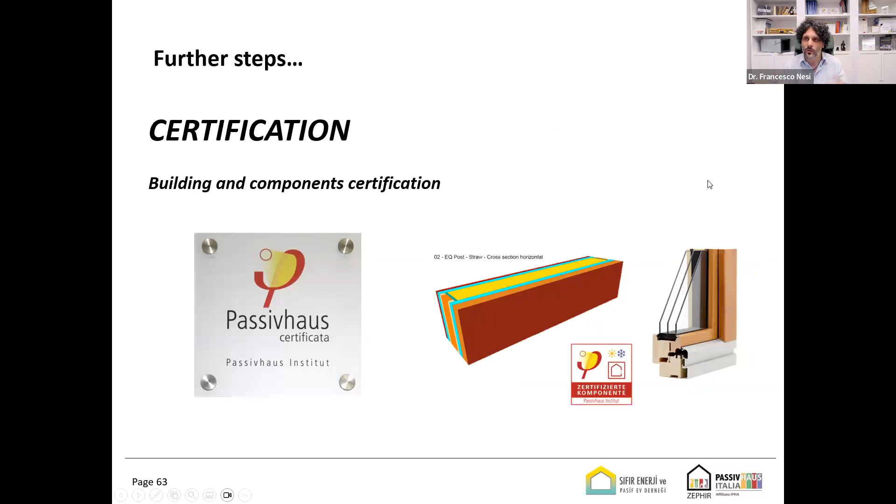to support an existing architect or designer you could have, or to analyze from the economical point of view several solutions, several variants, and so on, or certification. So certification activity: I'm one of the 30, 40 certifiers in the world, acting worldwide, as well as some people from ZEPHIR. So you can do this also with them, as well as certifying components such as building systems or building components like windows, rollers, shutters, boxes, and so on.